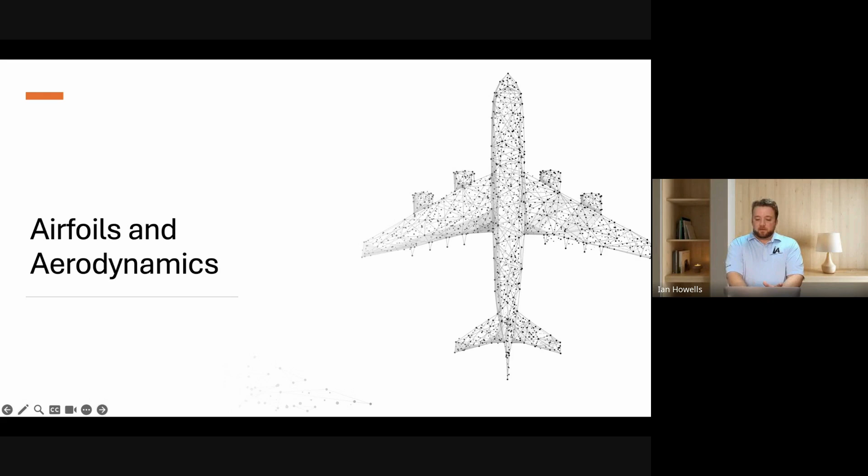We're going to start by talking about airfoils and aerodynamics. This is the calculation of lift. Lift is equal to 1/2 of the air density times the velocity squared times the surface area of the wing times the lift coefficient, which the lift coefficient is essentially determined by your angle of attack.

Now, I bring this up not because I want anybody to do math, and I will not be doing math for you in public, but as we look at the things that go into the calculation of lift, what actually creates lift? We can look at the S, the surface area of the wing, and if you want a bigger wing surface area, you have to fly a different airplane. That's how that works. We have no control over it.

The density of the air is another thing that, unless you're a scientist in a controlled environment, you have no control over. So the two big things that we're looking at in the calculation of lift is velocity relative to the air and our angle of attack. And as we talk tonight about lift and landing and aerodynamics and everything else, what I want you guys constantly thinking about is, how do I control the amount of lift being produced?

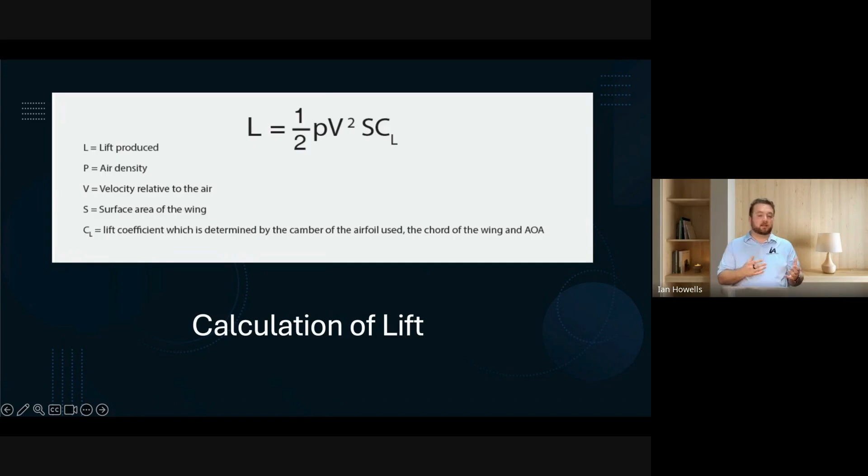Controlling the amount of lift being produced is essentially our job as a pilot. And aerodynamically speaking, that's one way of looking at it. That's a very common way of looking at our job, is maintaining an angle of attack and maintaining our thrust lever, which is producing more or less lift, putting us higher or lower relative to the earth. Okay.

As we jump into some of the aerodynamics of an approach, an instrument approach or a VFR approach doesn't really matter, but as we look at lift, we've got a couple different airfoils on the aircraft, right? I would take this time to ask you what they are, but I realized that I put them up on the slide, and so you can see the main ones that I'm talking about here on the aircraft. Okay, the propeller is an airfoil that's creating the high and low pressure differential, that's creating that thrust that's pulling the aircraft through the air.

Our vertical stab back here is essentially an entirely uniform airfoil that, while it does produce lift as we fly through the air, is producing equal amount of lift depending on which side that we throw it into the air, and you guys understand. Our wings that we're talking about mostly, as we increase and decrease our angle of attack, which we're going to talk about, we're increasing and decreasing the amount of lift.

We can also increase or decrease that amount of lift simply by throwing more air over the wings. As I talk about throwing air over the wings, of course, I'm not talking about bringing the air to the wing. I'm talking about bringing the aircraft through the air mass, increasing or decreasing the amount of lift.

That last one, the horizontal stabilizer. I'm not talking about the elevator back here. I'm talking about the horizontal stabilizer. It also produces lift, but it produces lift in the opposite direction of our wings. That creates what's called dynamic stability of the aircraft.

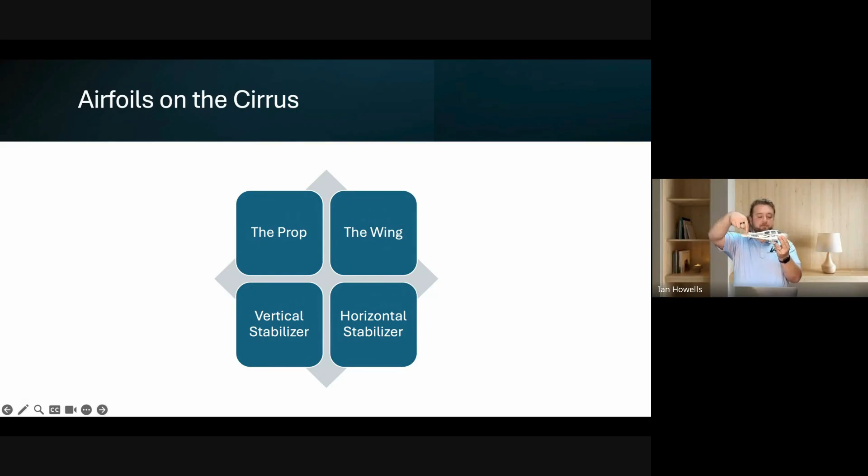Okay, so as we're flying along, if we simply pull the thrust lever back, we decrease our aircraft going through the air and the amount of air going over the wing. We're going to decrease lift, but we're also going to decrease the tail down force that's happening on that horizontal stabilizer.

Okay, now I realize as I talk about this, a lot of us understand it. Some of us learning to land, maybe this is new to you. Maybe this is something you're going to go over with your instructor. But what I want for everybody to do is think about what that means for our aircraft as we come in on an approach.

Because what I often see, as I'm watching people fly in the simulator, or as I'm sitting in the right seat, watching the stick and throttle out of my peripherals as I'm watching the horizon coming in, is I see the stick move, and I don't see the throttle move, and then I see the throttle move, and I don't see the stick move. We're catching up to the aerodynamics of the aircraft. We're making one input, which is good.

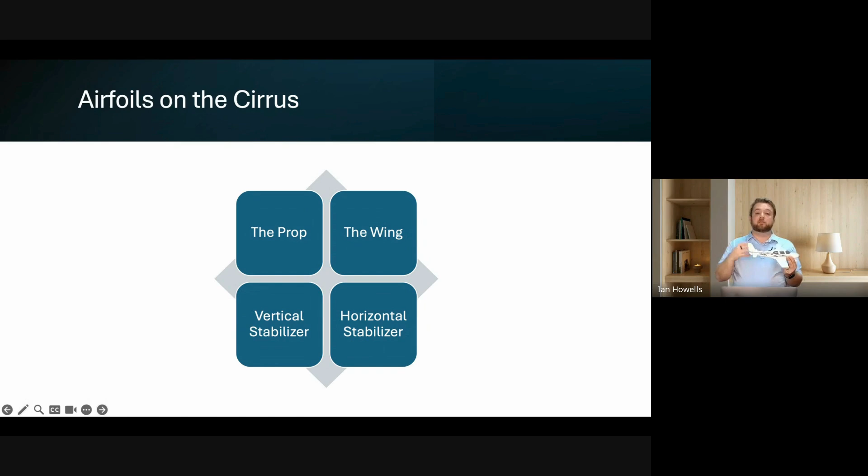Some people use pitch for airspeed and throttle for altitude, or vice versa as we're coming in on an approach. And those are great ways to learn to fly. But as you get more and more advanced, if we think and we try and stay ahead of the aircraft, what we're doing really is a throttle input and a pitch input that we know through experience only. And I wish I could tell you how much pitch and how much power, but that's what makes you guys pilots.

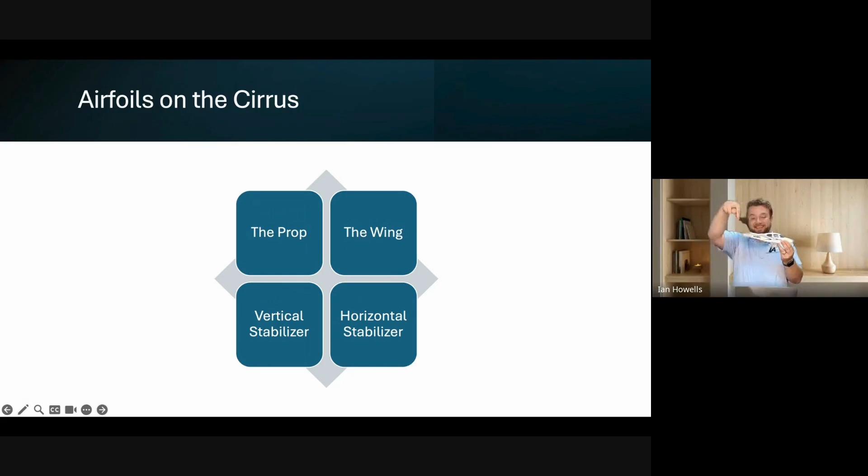Anytime that we're in on an approach and we need a large power change, we should be adjusting our elevator as well. The elevator is what gives us ultimate control over that angle of attack, aerodynamically speaking. When we increase our throttle, we're increasing the amount of lift produced on the tail in a downward direction, therefore pulling up the nose. So make sure that you guys are staying on top of this on your approaches. Make sure that you're staying ahead of the aircraft.

Anytime that we are making a throttle change, we know that that's going to adjust the pitch of the nose. With that said as well, sometimes we see some throttle jockeying, especially as we come up in the winds. If we don't need to go all the way from 75% of power to 25% of power, we're then not going to need to take the stick and make the nose do all of this.

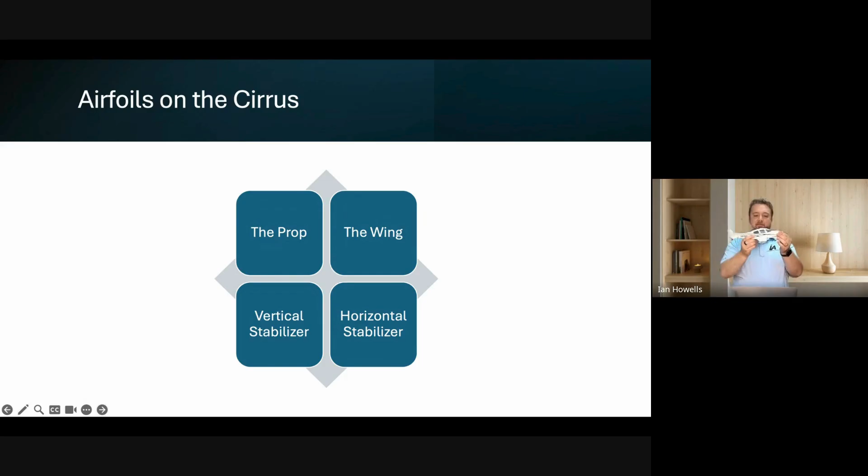Notice I'm rotating the tail, not rotating the nose. We'll talk more about that as well, right? But the aircraft then starts doing this as it's flying through the air, coming down in a constantly changing energy state, adding more variables. So make sure that you guys are staying ahead of that.

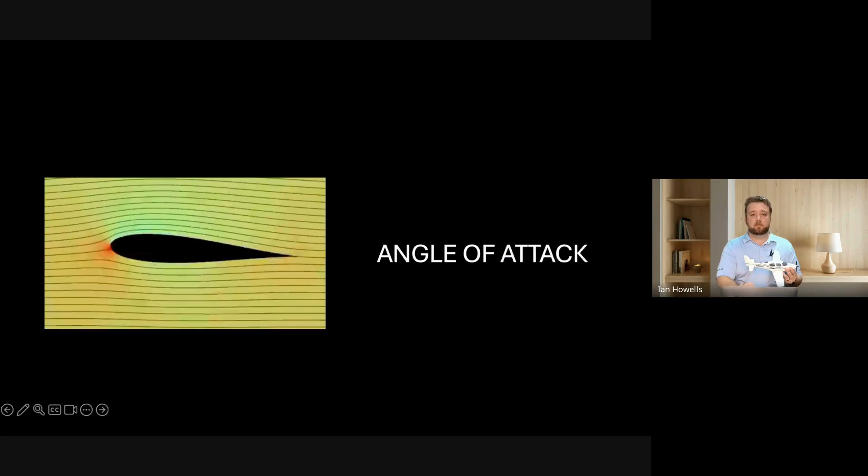Our angle of attack, as we're talking about managing that angle of attack of our main wings, we don't think about managing the angle of attack of our horizontal stabilizer. But as we're talking about managing that angle of attack, a quick review for most: leading edge, trailing edge, upper camber, lower camber.

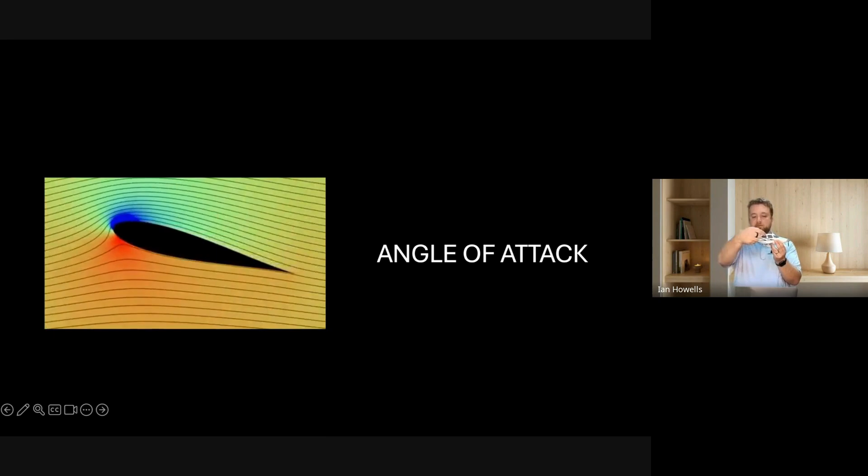If we could bisect this wing and cut it off, I'd break it off, but somebody'd probably yell at me. If we could bisect this wing so that it was one solid piece and we draw a straight line from the leading edge to the trailing edge, that makes up our chord line and our angle of attack. As you can see in this image, as we increase our angle of attack without increasing airspeed, we increase lift.

Another way to do this, if we stopped the aircraft right here and we simply increased the speed of the air going over the wings by increasing the throttle and going faster, we're also going to increase the lift being produced and we're going to go up.

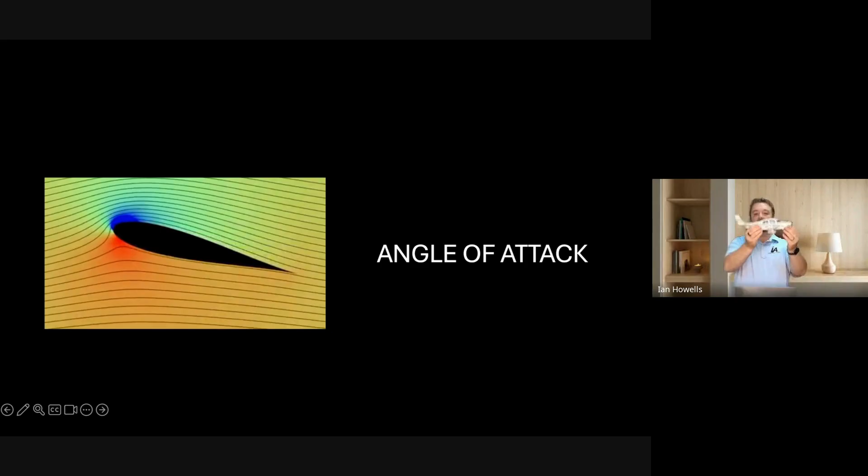Now, these are all good things to think about while here on the ground. When you're in the aircraft, please don't be thinking about the calculation for how much lift your wing is producing. We're simply flying the aircraft by managing all of these pieces all at once.

Any questions so far? This all makes sense to you guys, is what I'm taking from that.

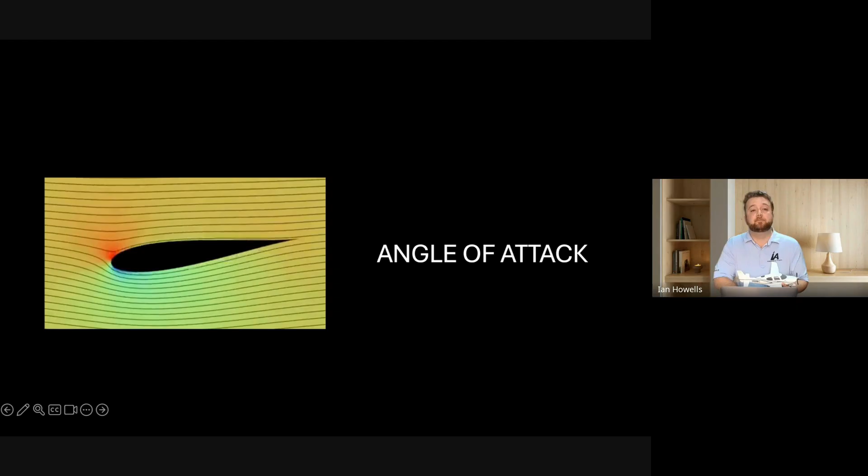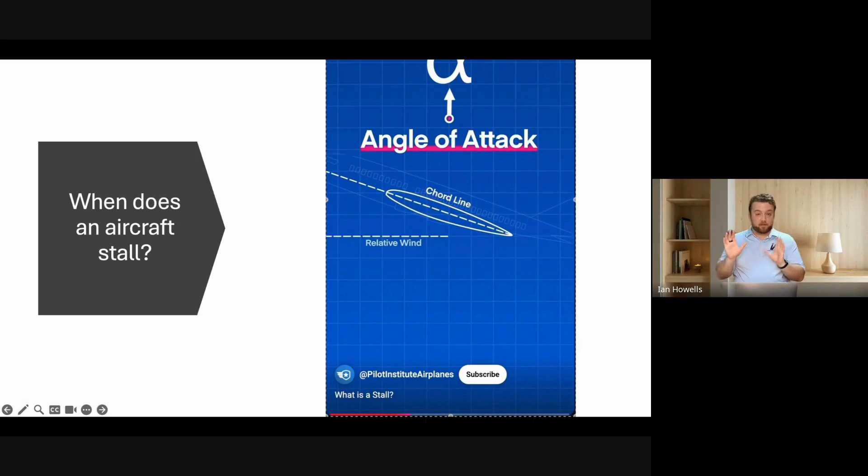So like I said, this is just my professional opinion on how we got to the place that we are, where we are coming in far too fast on our approaches. Really, at the base of all of this is a fear of stalling and a fear of death, rightfully so. But if we understand why an aircraft stalls and how an aircraft stalls and when we're likely to stall, we're much less likely to come in.

So I want to take a couple seconds to talk about stalls, not just because we're getting close to a stall while landing, or even potentially stalling while landing, which we'll talk about. But I want to talk about how an aircraft stalls, why it stalls, and all of that.

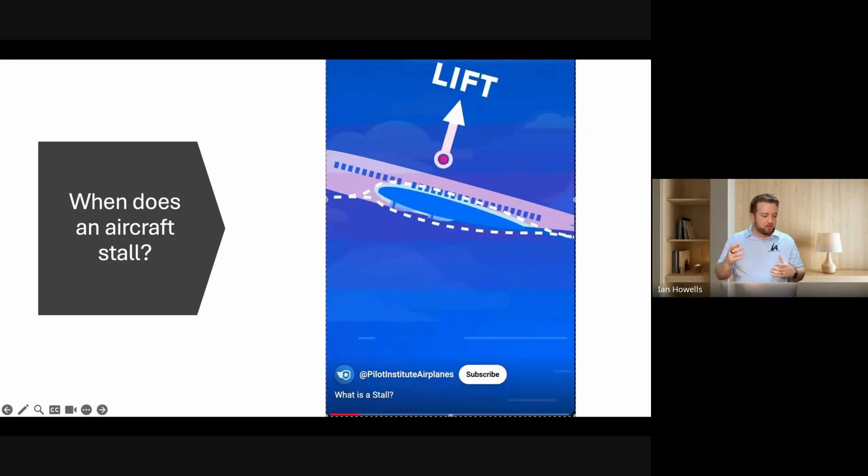When I used to be the chief here at Independence Aviation, I would do CFI interviews. And one of the questions that I'd ask first and foremost, and I kind of knew how the rest of the interview was going to go, is I'd ask, when does an aircraft stall? And if I heard the words, when it gets too slow, I would know that the rest of the CFI interview probably wasn't going to go well.

Now, for those of you out there who think, well, yeah, it does stall when it gets too slow, you're right. It does stall when it gets slow enough, and especially when we're in a known configuration and a known attitude, we can pretty reliably get the aircraft to reach that critical angle of attack at the same speed every time. But that's not when the aircraft stalls.

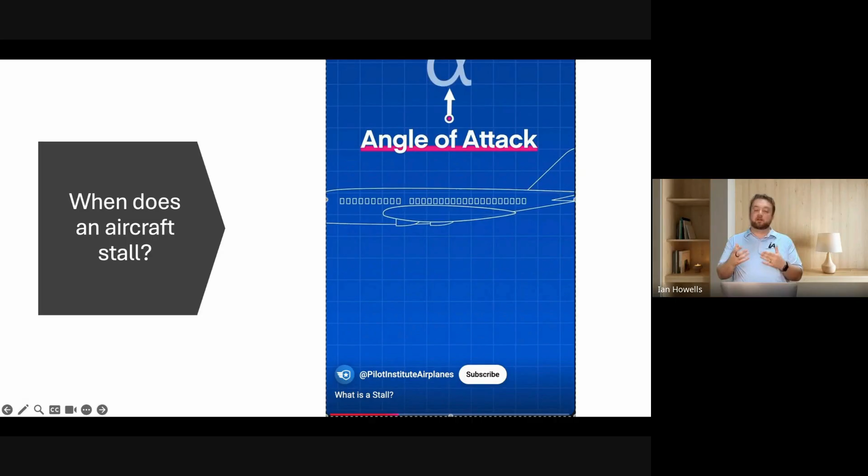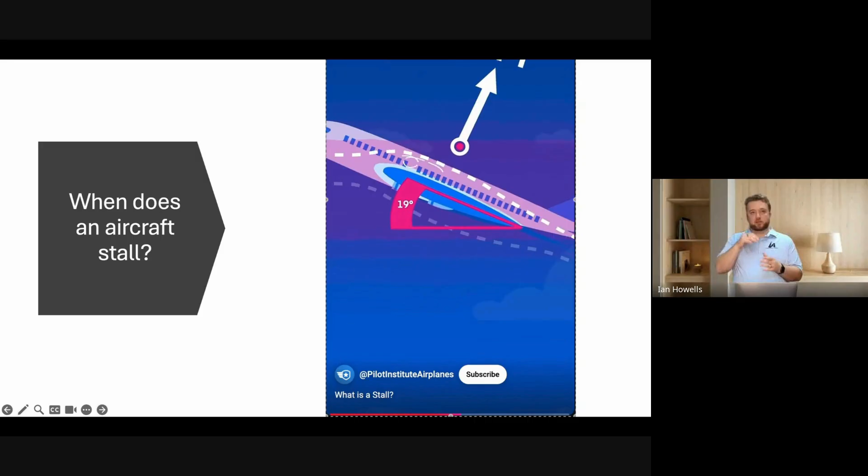The aircraft stalls when we reach the critical angle of attack, and when we reach that critical angle of attack, as you see in this looping video, airflow separates from the top of the wing, and that's what creates the almost complete reduction in lift. Okay, so by reaching that critical angle of attack, we stall the aircraft. Does that make sense to everybody? I see some nods.

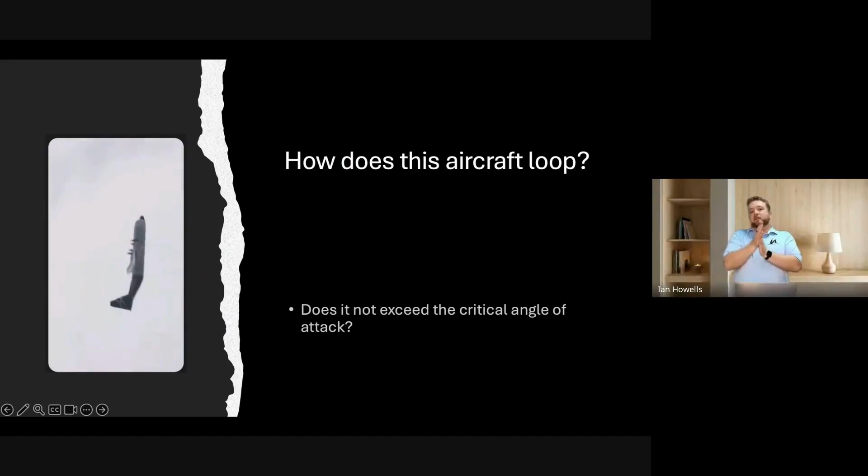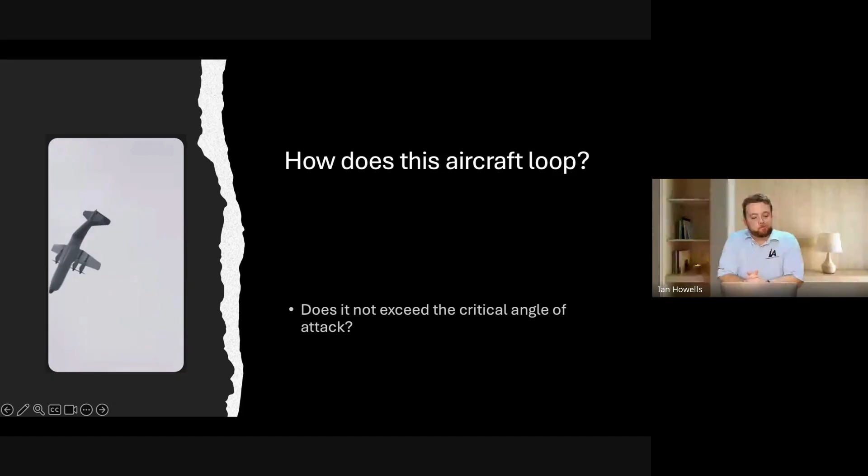I pose to you this question then. As we see this video of an aircraft looping, how does that work? Does the wing of that 4-engine aircraft not exceed the critical angle of attack, especially there as you see it getting up to 90 degrees? How? Why? Are we, in fact, reaching that critical angle of attack as we go through and loop?

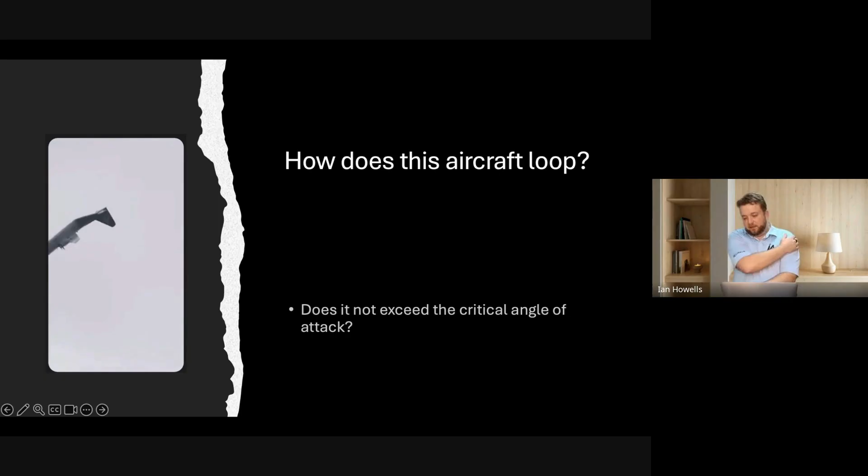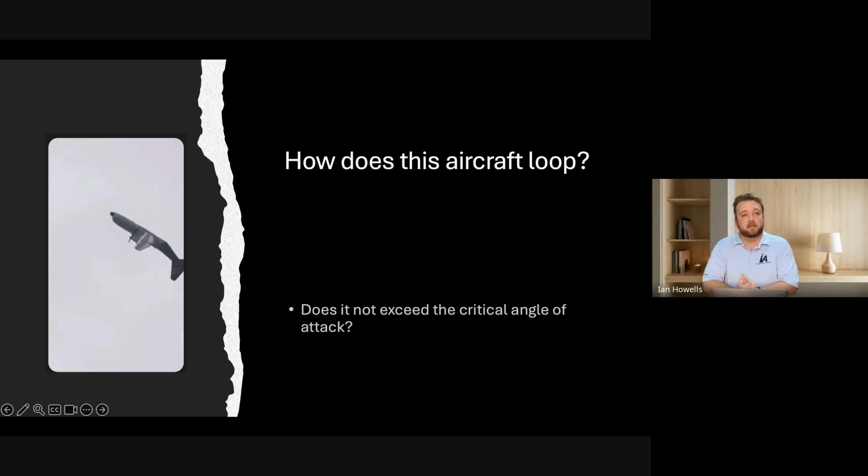Anybody care to answer my questions, or am I just talking to space? You know, I really like hearing myself talk, but I'd appreciate if you guys would drop an answer to my questions. If you're deep in thought, that's okay too. I don't want to interrupt you as you think through these things, as I now ramble on, giving you guys a couple seconds to think about this.

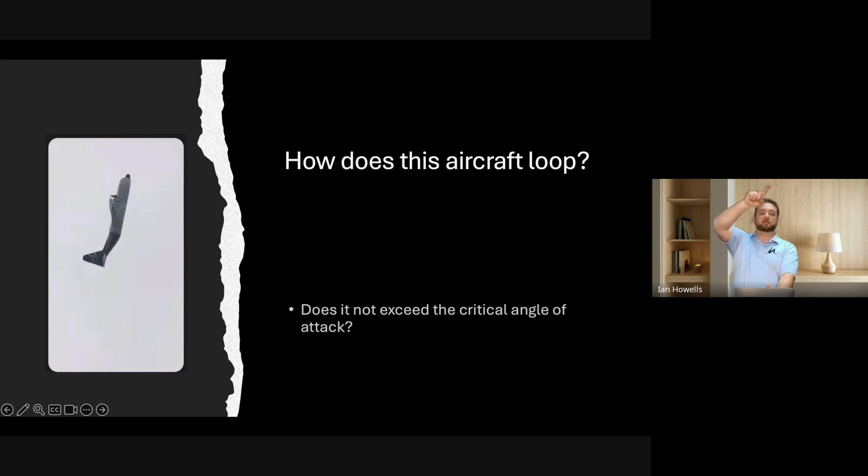A few of you have thought about what that critical angle of attack is of the looping aircraft, and a few of you may say, well, yeah, it just does stall, and then it comes up and it loops around. Unfortunately, there is a right and wrong answer in this, and that would be the wrong answer, that it just uses sheer momentum as we get into talking about kinetic energy.

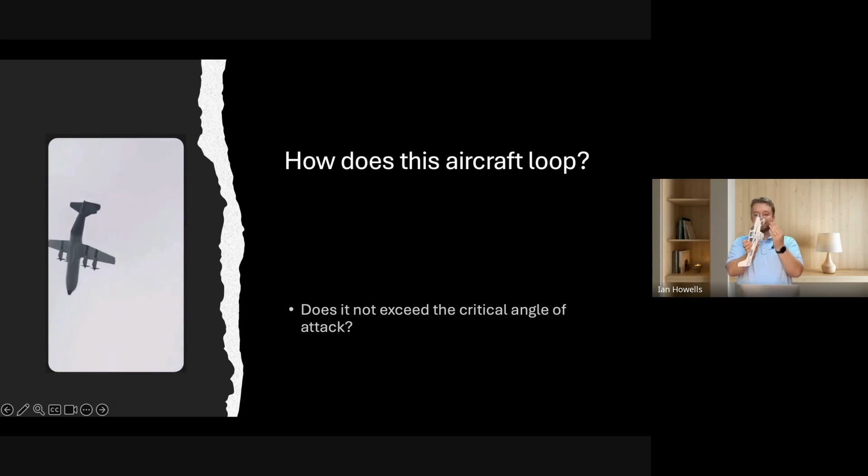As an aircraft goes through and does a loop, what we're doing is increasing the angle of attack of the aircraft. By increasing that angle of attack, we're bringing the nose up, we're using our elevator to come through, and our angle of attack reaches probably about 10 degrees nose up. And we think, well, yeah, if it increases any more and we go to 90 degrees, we exceeded that around 14-degree angle of attack that causes us to stall, so why isn't it stalling?

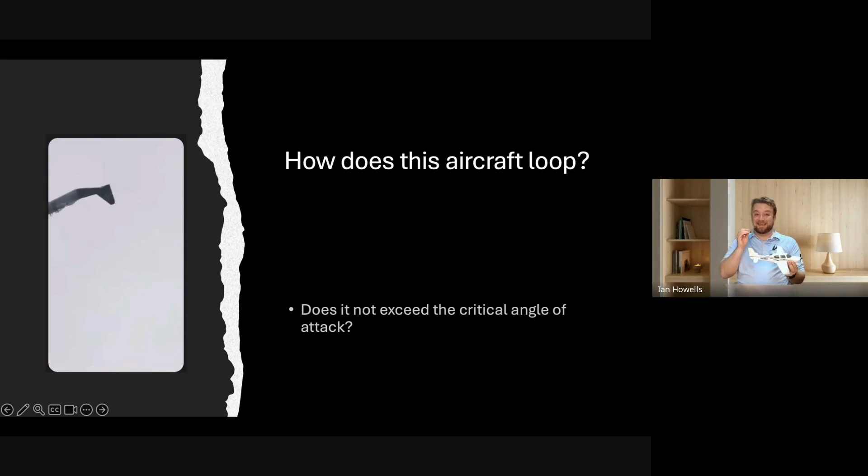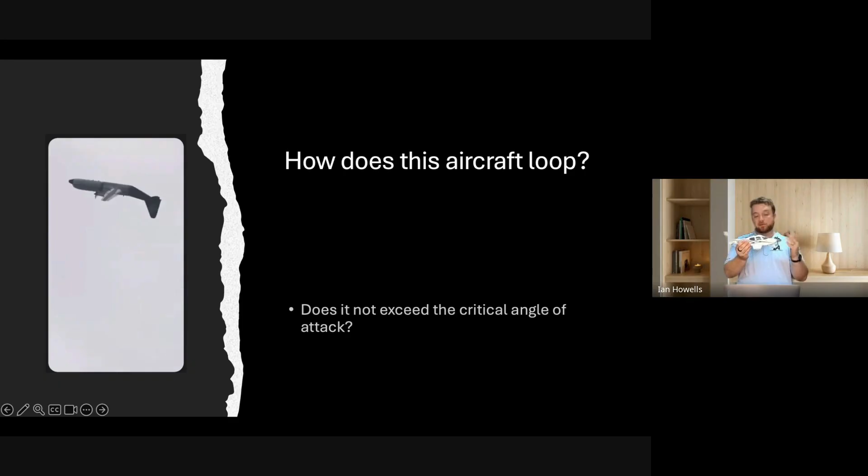And the answer comes not in exceeding the critical angle of attack, because the angle of attack is the chord line to the relative wind. Right? So as I tilt this aircraft up and over, we know that as we fly through the air normally straight and level, our relative wind is coming parallel to the earth, because most of the time that's how we fly. As I initiate a climb, though, in pitching the nose up, where is that relative wind coming from?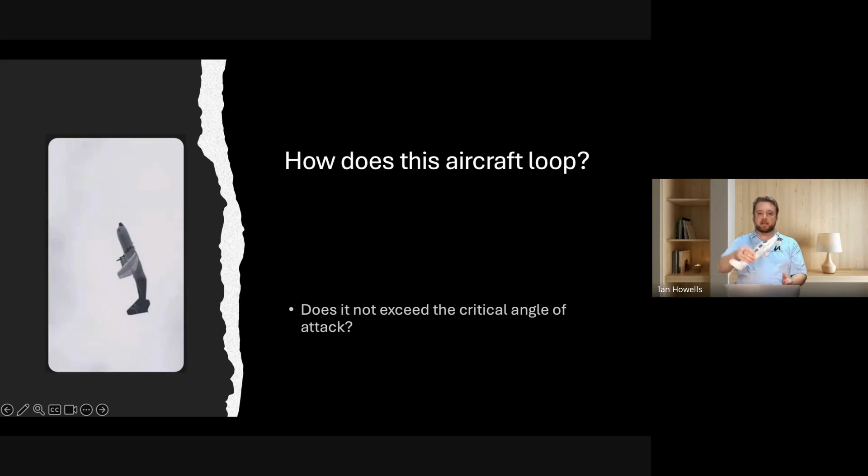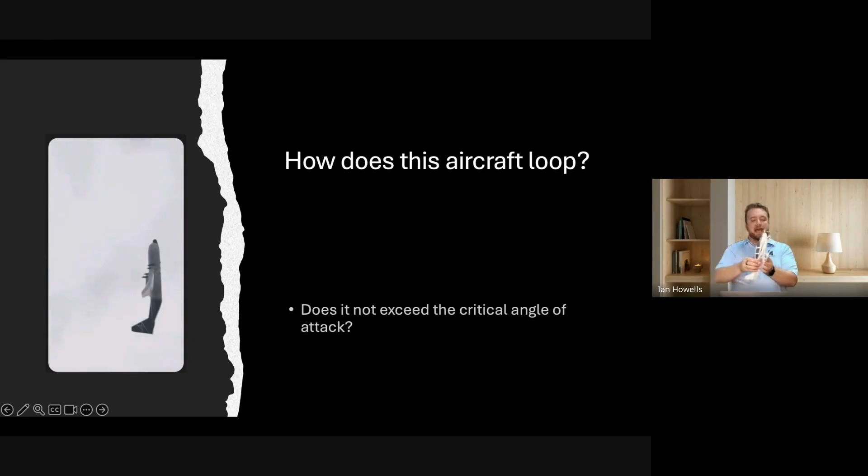It's important to note that the aircraft isn't simply rotating on a dime, it's coming up through the air. And whether it be the thrust or our momentum through the air that pulls us all the way up and around, our angle of attack as we're vertical is no longer coming from here. We've vectored that around, and it's followed the aircraft through that turn, so that by the time we get to 90 degrees, we're still at about a 10-degree angle of attack, right?

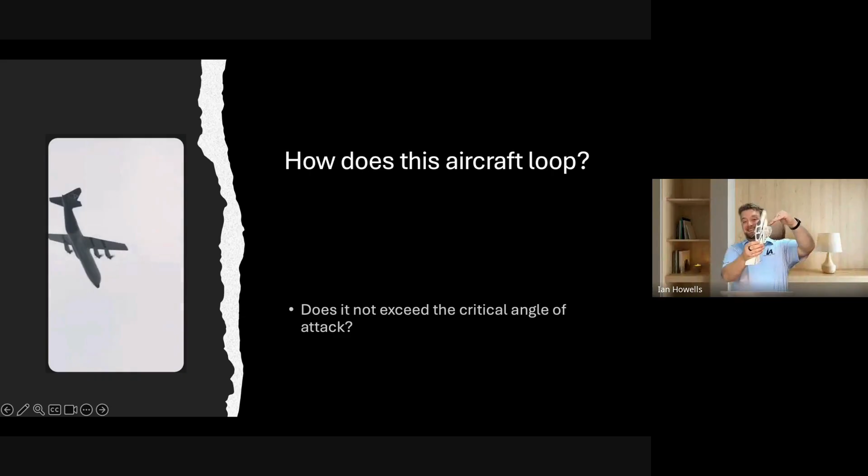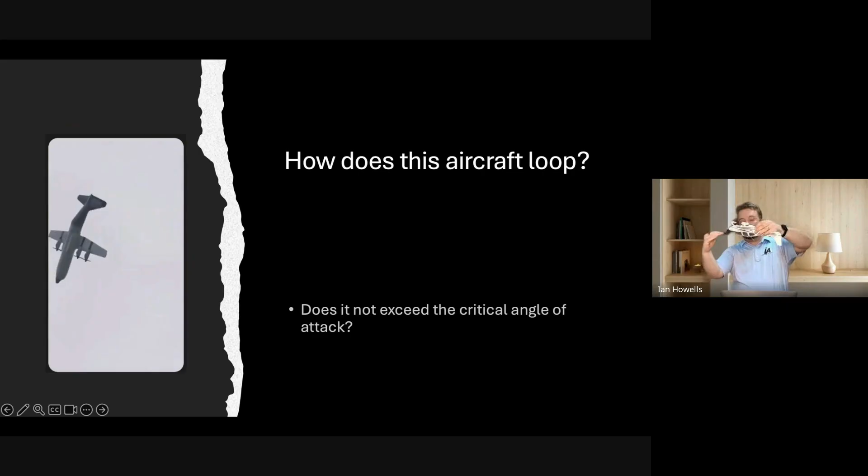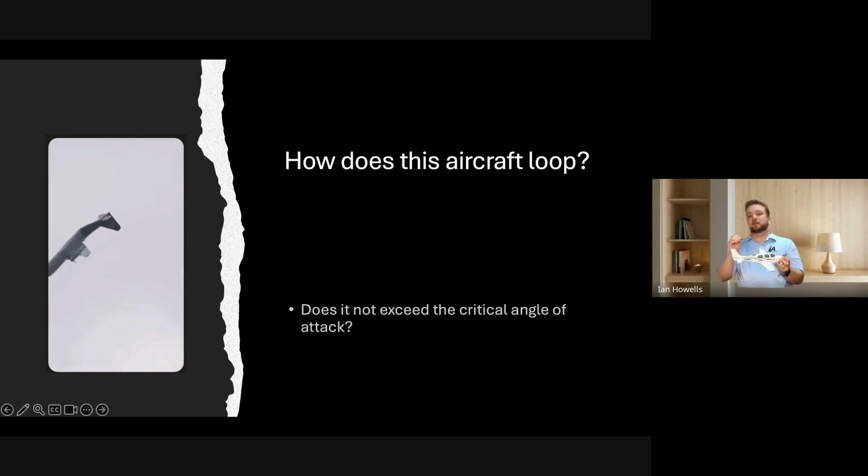And I can bring this to the front wing here. As we come up and over, our angle of attack as we're then upside down and inverted in the aircraft is coming from here. As we keep that angle of attack to the relative wind down and we're inverted, that angle of attack is still pulling the nose down and through. And as we complete that loop, we have never exceeded the critical angle of attack because of the relative wind hitting the wing. Does that make sense to everybody?

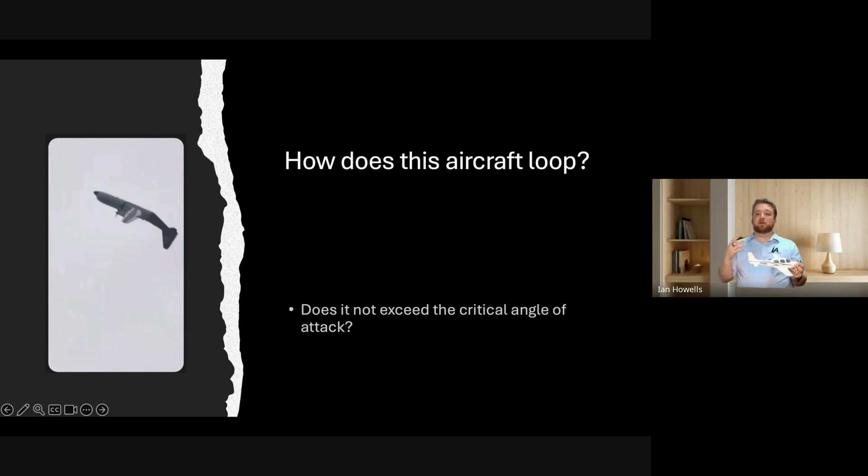As we think, well, why is this guy talking about stalls, right? I thought we were going to talk about landings. Our stalls, as we're coming in on approaches, we're reducing our energy. We're getting towards that stalling angle of attack, though we may never actually reach it in the landing, right? And it's important to note that it's not just getting slow that causes you to stall.

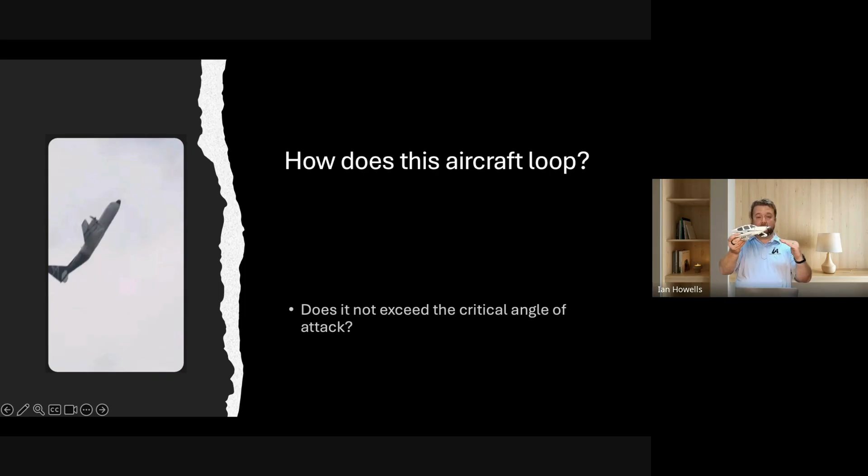If we're coming through sinking air and we think about where that air is coming, we're coming towards an air mass at an angle. If our angle is about 3 degrees down to the runway, where is our relative air? Well, it's coming from 3 degrees to the runway. So if I pull back on that stick, am I likely to stall at only 3 degrees nose up? Now at 3 degrees, probably not, right?

But if I'm trying to maintain this descent coming in and I'm pulling the nose up, I'm going to see the airspeed decrease. But the point of this is not just I need to keep my speed up. It's I need to think about how I am approaching the runway. If I have vertical wind shear or turbulence that comes through, that can drastically change my angle of attack, and we may hear the stall warning horn go off. We may run into that stall.

As we're thinking about our approach, it's not that you shouldn't pay attention to airspeed. It's not that you shouldn't pay attention to your AOA indicator if you're coming in. It's just thinking about, well, when is the aircraft actually going to stall and when am I actually in danger while I'm in the aircraft? Most of the time, we are safe. We just don't feel safe, especially as we watch that airspeed go from 80 to 79 or 80 to 78.

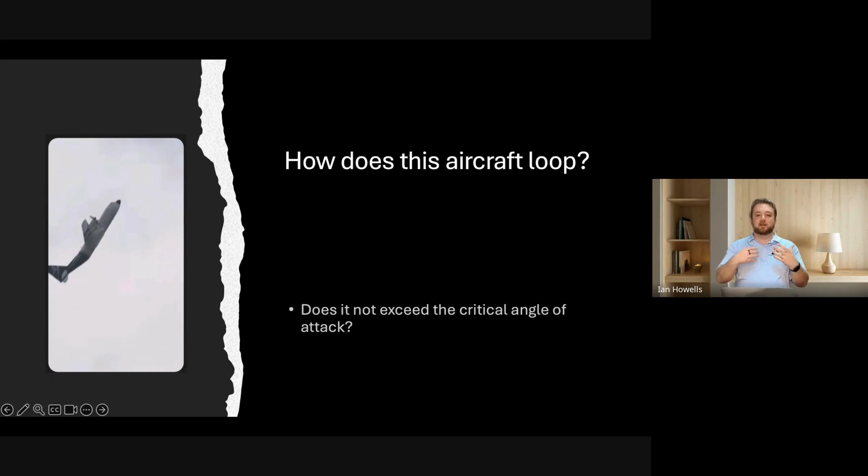We go, oh, I got to get going faster. Then we increase our airspeed, not just compensating for those 2 knots that we lost, but we're looking at 85, 90 knots and going, oh, I can't believe that I got slower than 80 knots. That's not what's important. What's important is that we're managing the energy of the aircraft as we're coming in.

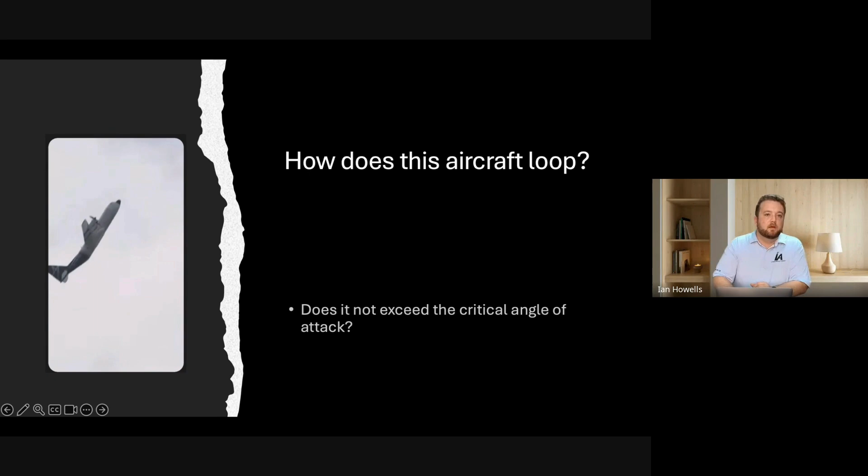I pose to you another question. This aircraft that's almost vertical, can it stall? Probably doing close to 170, 180 knots based on the picture and the way that I can see it. I'm making that up. But if I'm doing 200 knots straight down, is it possible for the aircraft to stall? The answer comes once again in the relative angle of attack.

If I pull out slowly, my relative air is down here. My angle of attack is up at about that 10 degrees, which once again, I'm just making up 10 degrees. And as I do that, the nose pulls out just like it did as we came through in that loop. However, at 150 knots, if the energy of the aircraft is coming this way, and I yank back, where is my angle of attack then?

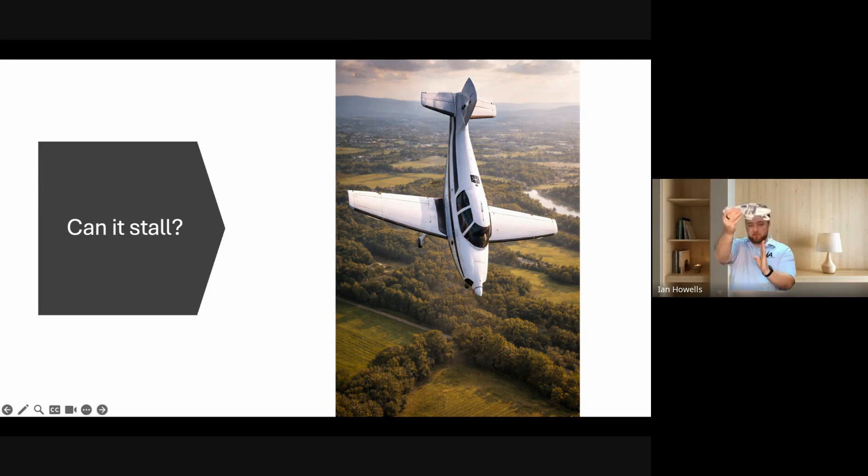Well, if I pitch to 90 degrees, it's the same thing in reverse where we are stalling. Even though we're parallel to the Earth, our relative air is still coming up, and therefore the wing is in a full stall, and we will continue to fall through the air. Does anybody have any questions about accelerated stalls? This all makes sense.

So let's talk about this approach speed, right? Here I've pulled out of, I believe, an SR22 Turbo, the bottom of the white arc. The bottom of the white arc being 64 knots. 1.3 times 64 is going to be right around 80. Now, this is the most adverse condition.

As we talk about aircraft weight and we talk about the aircraft coming in different configurations, flaps 50, flaps full, different weights, VREF may move around. Okay. Our stall speed may move around. Once again, we're not stalling because we're at that speed. We simply know that on an approach, we're going to reach our critical angle of attack at about 64 knots. So what do we do? We increase that speed that we come in at so that we're not just hanging out on that stalling angle of attack and hoping that we fly our way all the way down to the ground.

Okay. So 80 knots, 80 knots, 80 knots is what we hear when we're flaps full. We hear 85 when we're flaps 50. We hear 90 knots when we're flaps up. Those configuration changes are going to change the speed at which we should come in on our approach. 1.3 times, if we come in at 80 knots, we're looking at a 16 knot buffer between our stall speed, where we are likely to stall, and our approach speed.

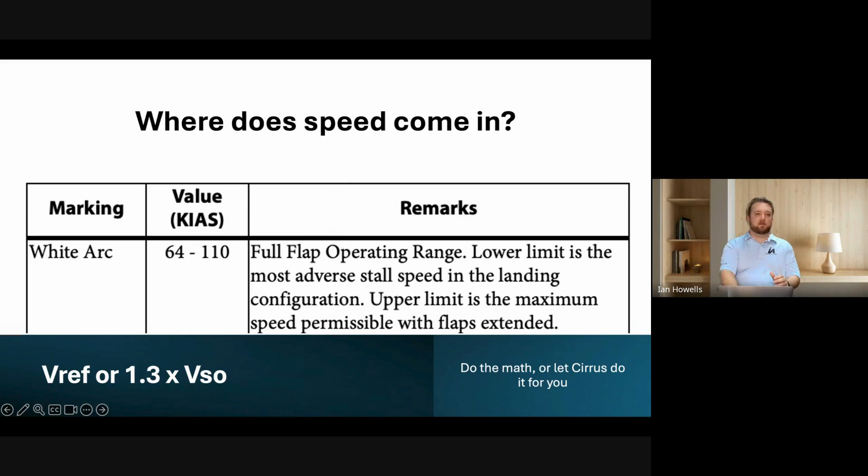The other thing is we keep coming through and we talk about our energy management. Okay? Our energy management is planning altitude and airspeed, which is really what goes into all the energy that we're making in this aircraft. Managing our mechanical energy, which is the total of our potential and our kinetic energy.

And as I get using some of these scientific words and throwing equations at you guys, once again, I don't do math unless I have to. Well, I guess I probably could, but I'm not going to. And I don't want you focused on thinking about these things when you're flying. I want you premeditating them, thinking about them now, and then taking these into the flying that you do as you're coming in on an approach.

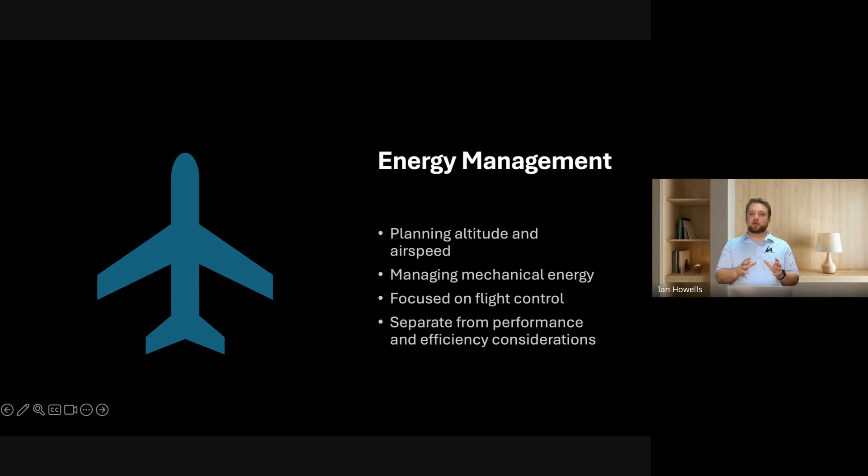As we're talking about mechanical energy, we're talking about our total potential energy as well as our kinetic energy. So essentially our altitude and our airspeed. Energy management is all about focusing on our flight control and how we are controlling the aircraft. And it is separate from the performance and efficiency considerations. So as we talk about energy, we're not talking about how much fuel we're consuming. We're not talking about our engine. We're simply talking about the raw physics of landing.

As we look at potential versus kinetic energy, potential energy is the amount of energy due to the altitude, expressed as mgh. M is the airplane's mass, g is gravitation, and h is altitude, right? Potential energy is essentially the way that gravity is going to react with an object. As we're in the aircraft, we're talking about being up at altitudes and creating lots of stored energy because we always have gravity that can bring us down.

That gravity that can bring us down means airflow over the wings, i.e. the aircraft moving through the air. So we're still creating lift using stored energy instead of just our engine, right? Gliders do this. They have to get up there somehow. They have to create the potential energy by getting the altitude, but then as they fly through the air, they're able to use that stored energy to take them down and through.

Kinetic energy, then, as we're talking about the kinetic energy of the aircraft, we're just talking about the airspeed, right? What I want you to think about when we think about kinetic energy is, and I know that this probably isn't very pleasant to think about, but as we're flying through the air, if our wings were to disappear, where would the aircraft go?

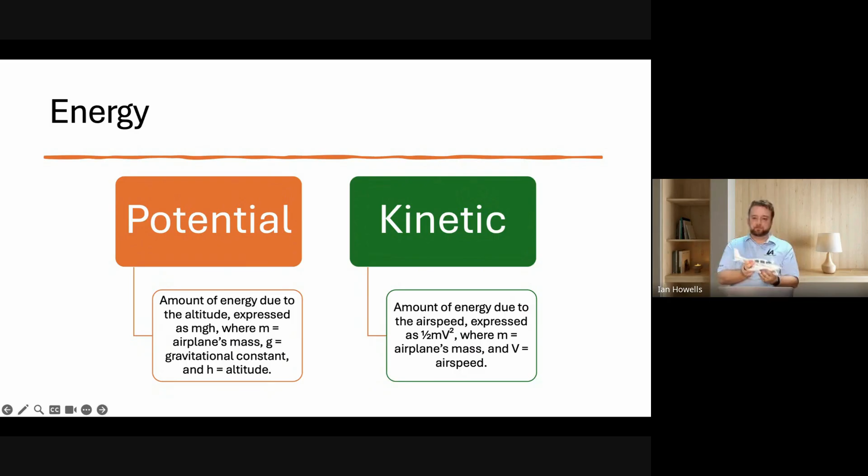I'm going to bring the treadmill back as we talk about energy, specifically kinetic energy, as well as the potential energy. But as we think about this treadmill during landing, how does that change? Why don't we have big treadmills at airports that bring us to a stop on the runway?

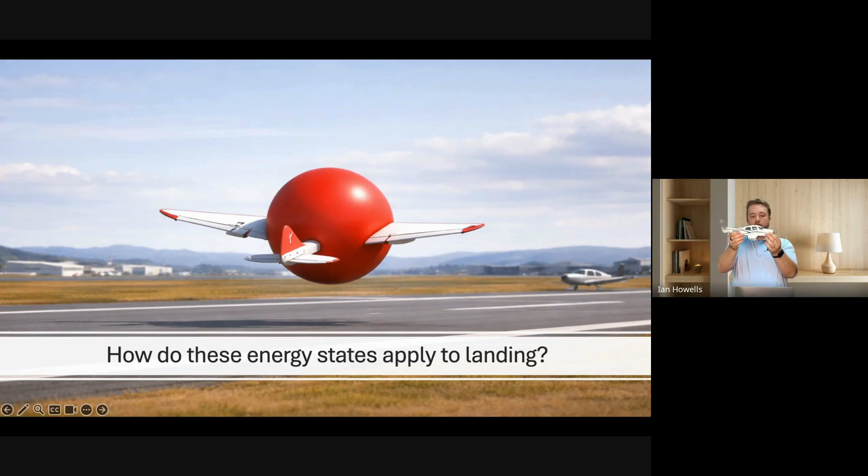It's also our ability to deplete as much of that kinetic energy as possible. And if we have some added potential energy when we deplete enough kinetic energy to come down, we get a little plunky, but that's okay, having an extra foot or two. If we're landing nose low, we see the aircraft come back up into the air. The worst thing we can do is pitch the nose forward, because it then bounces and starts to porpoise. Then we execute the go around, and we'll talk a little bit more about that.

Really, what we're looking at as we're depleting that energy, and we're talking about landing, we're talking about a single moment in time when the wheels touch the ground. And that's not what goes into a landing. What goes into a landing are the seconds before and the seconds after, how we manage our energy coming down to the runway, crossing the threshold, so that we can deplete it.

As we talk about the bouncy ball and we talk about depleting the energy, what I want you guys to think about is not a single point in time where the wheels touch the ground as the landing, but I want you to think of that landing beginning at 500 feet before we come down to the runway and ending as we exit the runway. Okay? Now you may say, well, yeah, that's a long time, but the landing and the wheel touchdown is somewhat of a misnomer and somewhat of a misthought, because a landing does take all of that time that we are controlling the aircraft with its aerodynamic resources.

Thanks for testing, Bryce. As we're coming down to the runway and we're thinking about that landing, one of the big things that I see constantly, especially in crosswind landings, is that people will come down, they'll touch down, and then they let go of the controls.

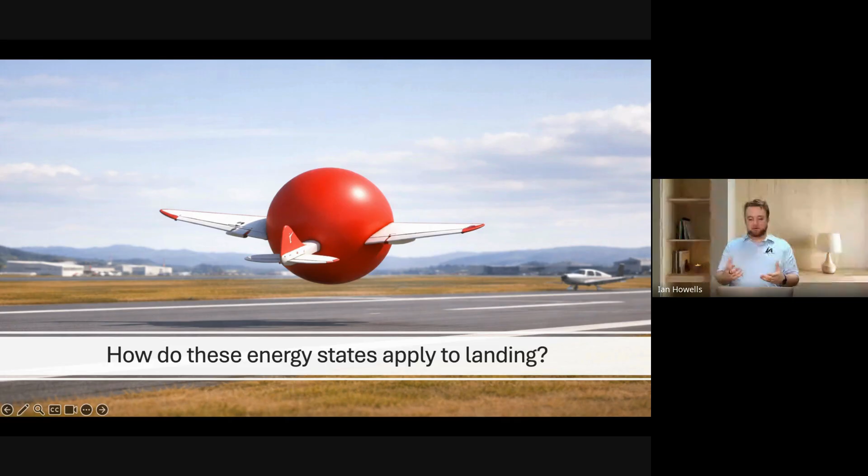So as we come through and I talk about all of these things, a couple things that I want to point out here, and I'm going to speed this up to 4 times speed. As we're looking at this approach, we're looking at our vertical speed and we're looking at our airspeed. Once again, that's the depletion of our potential energy and the depletion of our kinetic energy. As the aircraft comes in, we see the nose come up, and this is going to loop through a couple times as it's sped up.

You're going to see on the left, our airspeed, our kinetic energy decrease as we get rid of our potential energy, landing the lowest possible energy state possible. Now, one of the things that I hear from other instructors that I'm not a huge fan of is, oh, you should hear the stall warning horn before you touch down. And while that can be a good thing, one of the important things to note, we go up when we practice our power off stalls or our landing stalls in order to prepare us for this landing phase of flight.

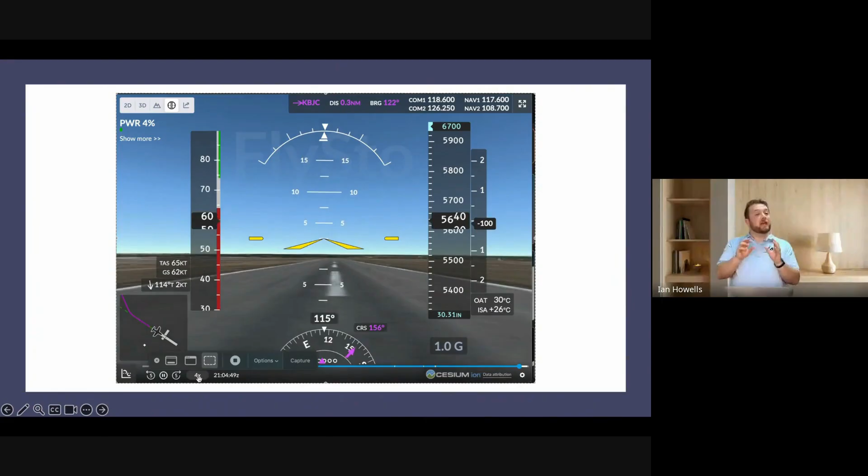We do want to touch down with the least amount of energy possible. And if we bring our nose up to the critical angle of attack, we will stall. If we bring our nose up to 5 degrees nose up and we have that stall warning horn go off, we know that we're landing in a low energy state, but it's not necessary for us to land. And one thing that I want to clarify is that we are not stalling as we land. We're flying our aircraft to the ground, and the mains are touching the runway just above that stalling speed, just before the time that we reach our critical angle of attack, right?

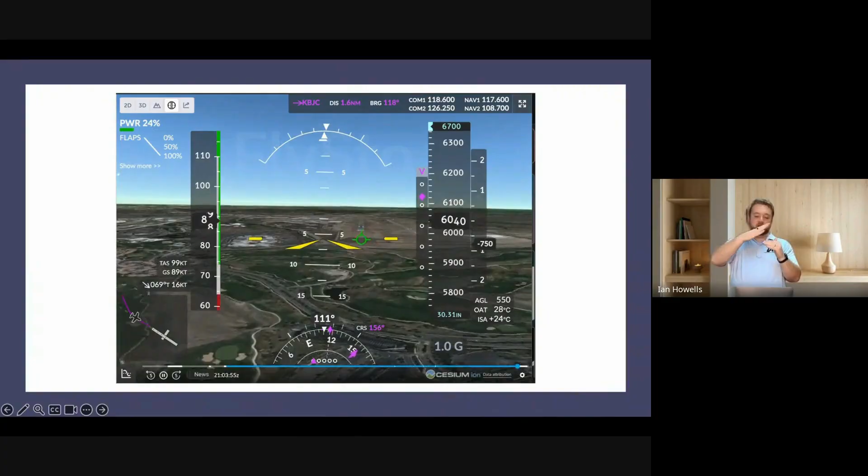If we come in with the kinetic energy low enough and we increase our angle of attack to about 5 degrees nose up, those mains should touch down and our momentum should pull us forward at the slowest possible speed, but we should be able to maintain control, keeping that nose wheel off the ground as we roll through.

And a lot of you are sitting here, I imagine, I don't know, because you're not talking to me in the question and answer section. But I imagine what a lot of you guys are thinking is, well, yeah, that's a lot easier said than done. I've been trying to do this, and my landings just get clunky sometimes, or sometimes I feel like I'm losing control for a second as I touch down, and I don't really know why this is happening.

The key to flying an airplane that a lot of us instructors talk about without really talking about is, as you're going through your initial training and you're going through your instrument training, we say fly the airplane. Especially when you start to get behind, that's a great time for us to say, hey, fly the airplane, right? I'm sitting here right now saying fly the airplane to the ground, don't actually land it, right? And what are we talking about?

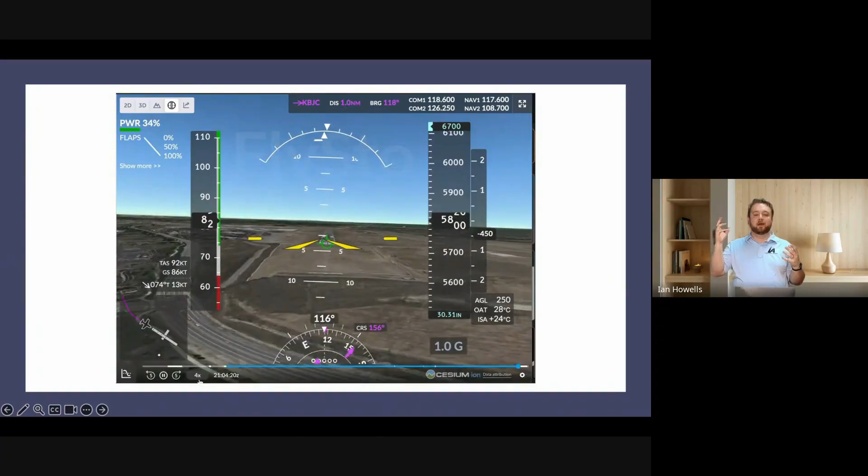When in visual conditions, when you hear your instructor say fly the airplane, or at any time that gong in the back of your head goes off and you say, man, I'm behind, I need to fly the airplane, what are we actually saying to do? And once again, I make this statement unfounded, and it's not in a book anywhere. This is just, we'll call it an Ianism, right? But every time I tell somebody to fly an airplane, anytime your instructor tells you to fly the airplane, the first thing that we're expecting you to do is look outside if you're in visual conditions, or do an instrument scan if you're in instrument conditions.

So as I'm talking about flying the aircraft to the ground, decreasing the mechanical energy of the aircraft to the lowest possible state without stalling, what I'm saying is look out to the horizon. What I'm saying is fly the airplane. Don't try and make landing a recipe.

If you come in right at 80 knots over the threshold and you pull your throttle to a certain amount and then you pitch up to 5 degrees nose up at the right time, you may be able to land the aircraft and land it pretty well 9 times out of 10. But on that 10th time, as the gust of wind comes, increases the amount of lift that your wing is creating and balloons you up, are you then still going to be able to fly the airplane to the ground with a recipe?

Right? This is why the robots can't yet land the aircraft 100% of the time, because landing is not a recipe. We have SOPs, and I want you guys coming in at 80 knots and pitch and power settings are good. I want you doing all those things, but what I want you thinking about more than that is, how do I maintain positive control of this aircraft all the way to the stop? The answer to that is by looking out at the horizon.

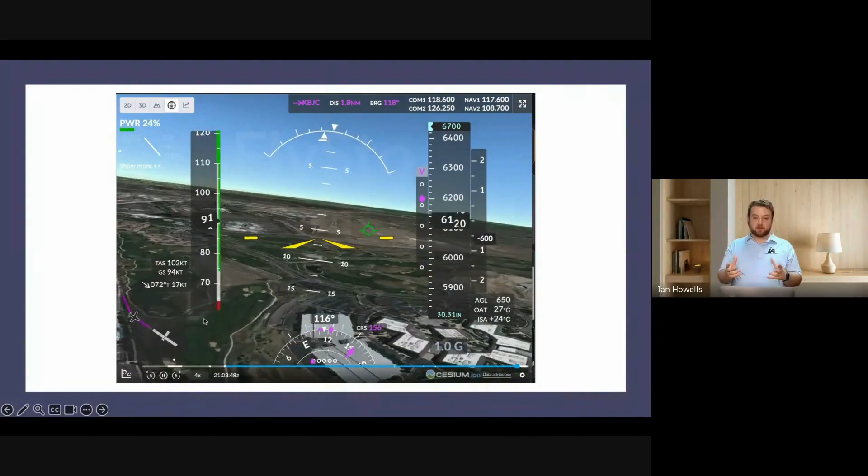Once again, I don't recommend going out and doing a soft field landing for the first time in a long time. I recommend that you go with an instructor if that's something that you want to do. Lastly, and this one does require an instructor, what you can do is keep control of the stick.

You're going to keep control of all of your flight surfaces. However, what you're going to do is give controls of the throttle to your instructor. Your instructor will then take care of a lot of the airspeed management, or I should say, will take care of the thrust changes to the aircraft as you're coming into land. And then what you get to focus on is just the flying of the aircraft.

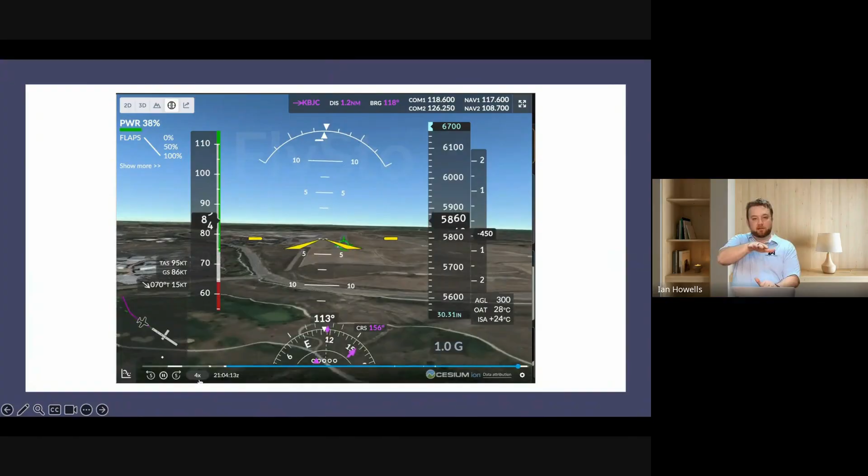As you do this exercise, what your instructor wants to do is have you keep flying and landing a little bit long as they go through and they pull out the power. It's going to allow you to find where that runway is as you're looking out at the horizon, instead of down at any of your instruments, and instead of trying to get the airplane on the ground already. They're going to keep you flying above the ground at a foot or two, and then they'll either pull the throttle to idle if you're looking like you're in a good landing position, or they'll push that throttle forward and just keep you flying along the runway, and then instead of doing a touch and go, you're doing a low pass.

Like I said, that's one that you cannot do without your instructors, so make sure that you call them up and just work on flying the aircraft and keep flying. What your instructor will do when you land is just pull the throttle out, and what you'll find is you're going to bring that nose up to 5 degrees, and you're going to fly and fly, and you're going to say, oh my God, I found it. I found where I should be in a landing attitude. Then they'll pull the throttle back. And instead of then panicking and pulling up or doing anything else, you're just going to keep doing what you're doing. Keeping that nose at 5 degrees, your wheels will kiss the ground, and you're really going to get to see what those landings are supposed to feel like.

For those of you learning to land, these are good exercises. For those of you who are feeling pretty good about your landings, but every once in a while you come in a little bit clunky or a little bit off, and you're debriefing and going, man, why did that happen? These are great exercises for you to make sure that not 6 out of 10 times, not 9 out of 10 times you're landing the aircraft well, but 99 times out of 100, you're landing the aircraft well and with intention.

Now, this is in no way saying that I land the aircraft well every time, or that your instructors land the aircraft well every time. We all get in those moments where, flying the aircraft, something unexpected happens. We have to change things up. It's not a recipe for a perfect landing, but it's going to give you the wherewithal that after every time you touch down, instead of going, man, that was so firm, what did I do wrong? You're going to think back, looking at the horizon, and in your mind's eye, you're going to say, I should have pulled the throttle back a little bit later. I should have increased my angle of attack. I should have, could have, would have. Okay.

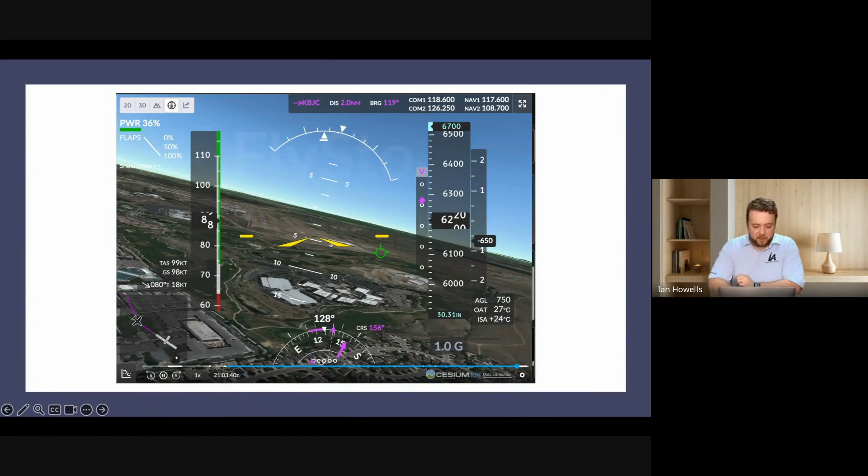What I want you to focus on is see how much that stick moves as he's coming in this crosswind. But as you look at the runway sight picture, the nose of the aircraft is pointed at his aiming point the entire time. As he transitions his eyes up, you still see that stick moving, and he's working really hard. But as we look at the sight picture, we see a little bit of rocking, right? We see a little bit of nose up and nose down, but as we're coming in on an approach, what we're talking about is keeping the aircraft headed in, most of the time, a 3-degree line directly down to the runway.

As this loops and we watch it one more time, watch the stick move and how much he's having to do with his throttle, with his stick, and watch how much the nose moves relative to the runway. Think about if you were flying your Cirrus and you're coming down to the runway, if you were to make stick movements like that in no wind at all, what would that aircraft be doing? You'd be making everybody sick, and that's the point.

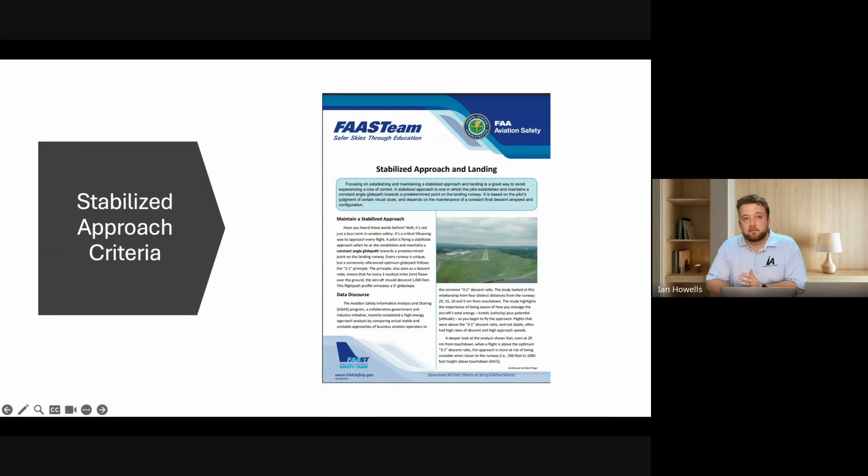Right. This is stabilized approach criteria published by the FAA Safety Team. What's funny about this is it simply talks about your descent to the runway, right? That descent angle, the glide path angle. And this is the way that the FAA described it for a long time: a stabilized approach is keeping your energy going on a single path down to the runway. Okay. They recommend a 3-degree glide slope, and they recommend no more than 1,000 feet per minute. Okay.

The 3-to-1 rule to determine your own is more math if you want to do math. Really what we're talking about, if you can load an approach and fly the glide slope or the glide path, even when doing a visual approach, great. If you're a student pilot or a private pilot only, using your PAPIs, using your VASIs, using that visual guidance to keep you coming in at the appropriate angle that's going to keep you clear of terrain.

Okay. So as we talk about this stabilized approach and we think about all the things that we've discussed tonight, we're thinking about how the aircraft is coming down to the runway and what the energy looks like. The more that the aircraft moves off of that localizer and glide slope or off of that PAPI, right, the more that we change, the more that we're throwing variables into our landing that we then have to compensate with skill.

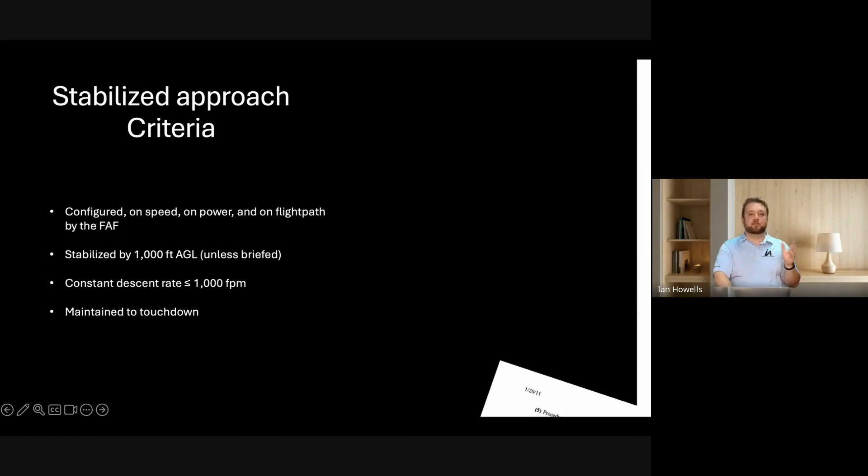As we look at stabilized approach criteria, the FAA later published in AC 120-108, they have a little bit more to say about what is a stabilized approach. They say that you're fully configured on speed, on power, and on flight path by the final approach fix, or that you're stabilized by 1,000 feet if you're doing a visual approach.

For us who fly VFR, 1,000 feet isn't a great idea to be on glide path when we're in a traffic pattern. So really what I want to encourage you to look at is 500 feet. Less than 1,000 feet on an instrument approach, less than 500 feet on a visual approach, we should be stabilized, which means configured on speed, on power, on flight path.

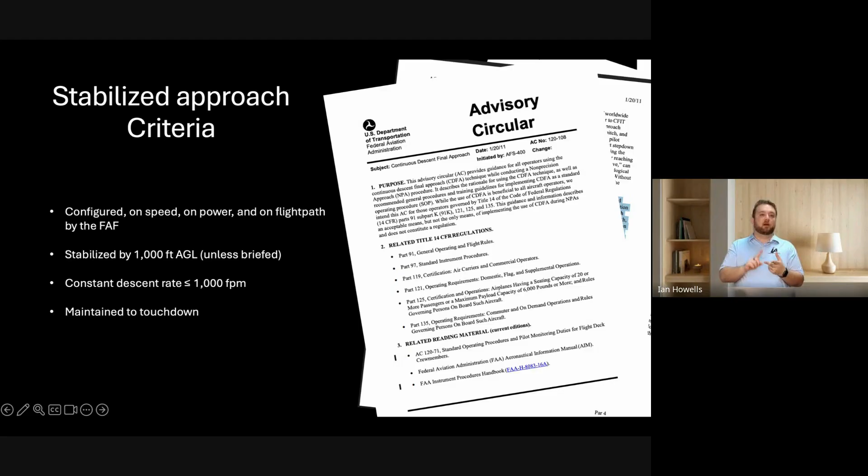A lot of times as we come through and we're on our approach, we're saying, yeah, this is good enough. Yeah, I can fix this. Yeah, this is fine. And that works for us a lot. A lot of us have heard Mike Goulian talk about the normalization of deviant behavior, right? For those of you who haven't heard of the normalization of deviant behavior, we do something and get away with it, so then we think it's going to work the next time and the next time.

When we read about aircraft crashes in a Pilatus or TBM and they crash 600 pounds over max gross, I guarantee you the pilot didn't wake up one day and say, hey, let's load this thing up 600 extra pounds. Usually that comes with 50 pounds, then 100 pounds, and then you get to the point where you're not really doing weight and balance, right? The same thing is happening to us with our approaches.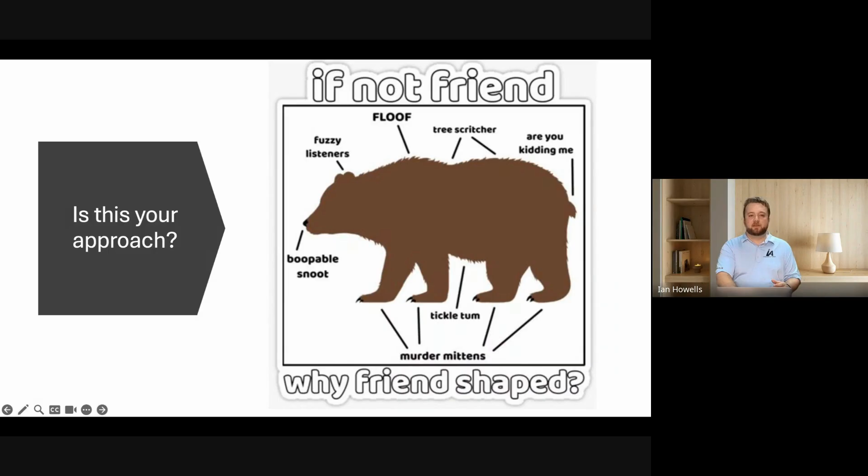Another way that I can put this for most of you successful Cirrus pilots and owners is that unstabilized approaches are sunk costs, right? We get so invested in doing it right the first time. We fall in love with the idea of, man, I can fix this. If your approach isn't stable, I encourage you to just go around, because it works and it works and it works and it works until it doesn't.

And that ends, eventually, for some of us and not all of us, getting used to saving approaches that are not stabilized ends in catastrophe. And I encourage you to make the go-around a part of your normal operating procedures and your normal training.